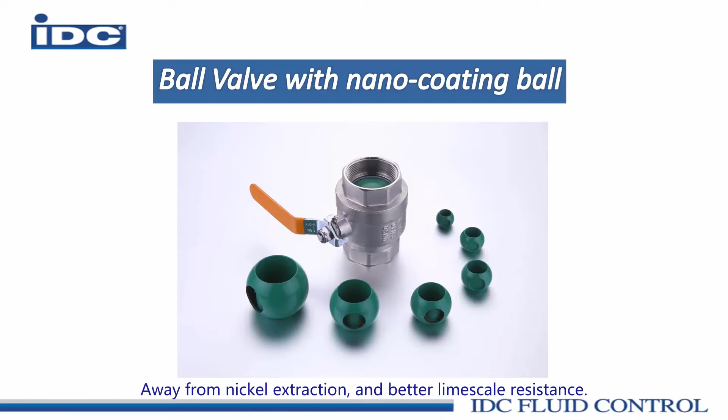Dear customers, I am now introducing a coating solution for ball valves, nano-coating ball. The coating is applicable for water with 3 features: environmentally friendly process, away from nickel extraction, and better lime scale resistance. We used to try different solutions and finally decided to go with nano coating. It came from the kitchenware industry, where pans, pots, and serving plates are made with the technology.

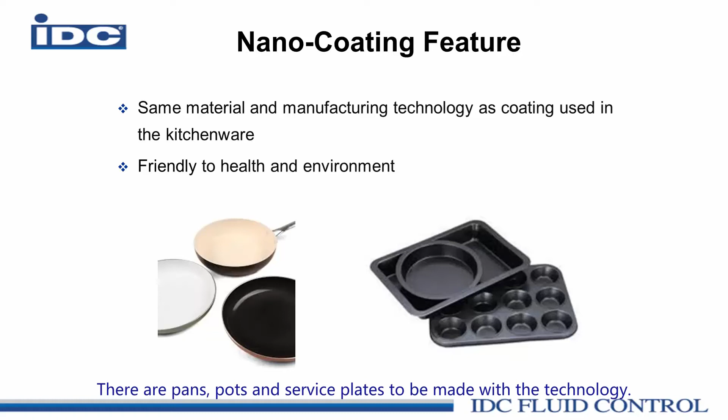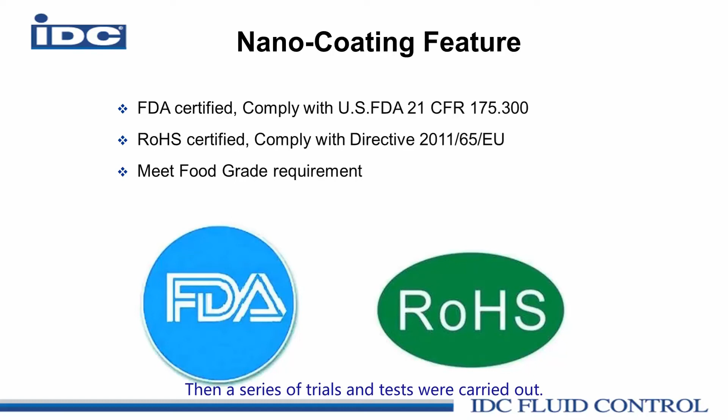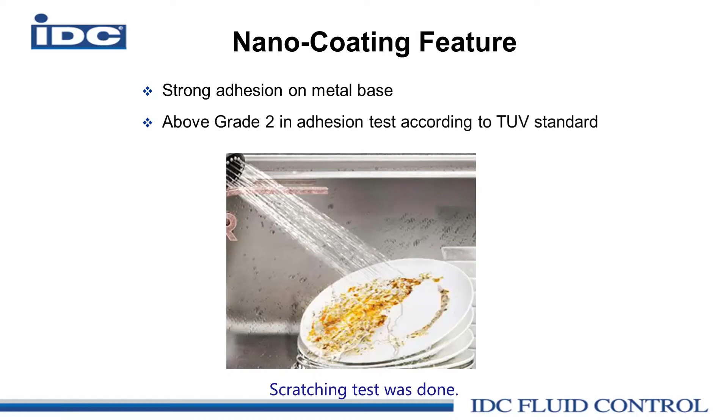We learned and studied the material. It was proved to be acceptable for food grade with FDA approval. Also, it complies with RoHS. We believed it was good for drinking water application. Then, a series of trials and tests were carried out. We did intensive testing on brass and steel base. Scratching test was done. It was well within the acceptable level.

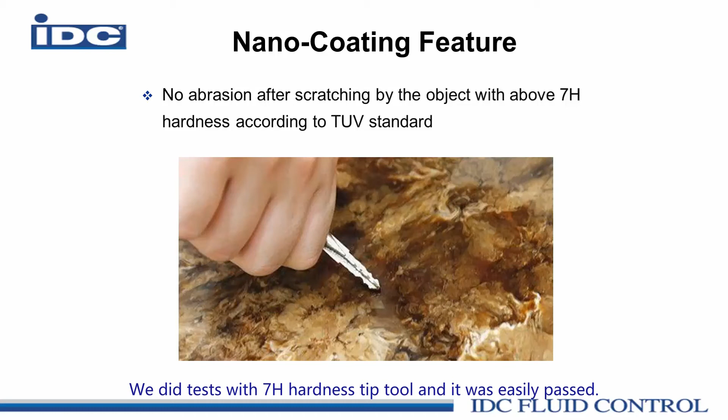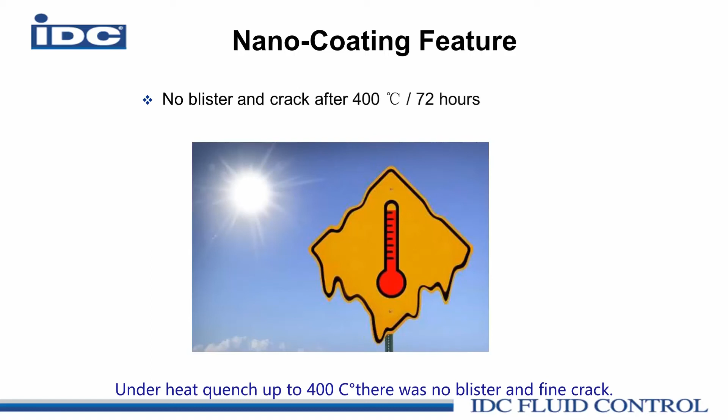Scratching test was performed according to TÜV standard on kitchenware. We did tests with a 7H hardness tip tool and it was easily passed. Endurance to temperature change: it was far more than water application requires. Under heat quench up to 400 degrees Celsius, there was no blister and no fine crack. Abrasion resistance: as shown, a weight was moved back and forth on a flat test piece for 8,000 or 3,000 cycles.

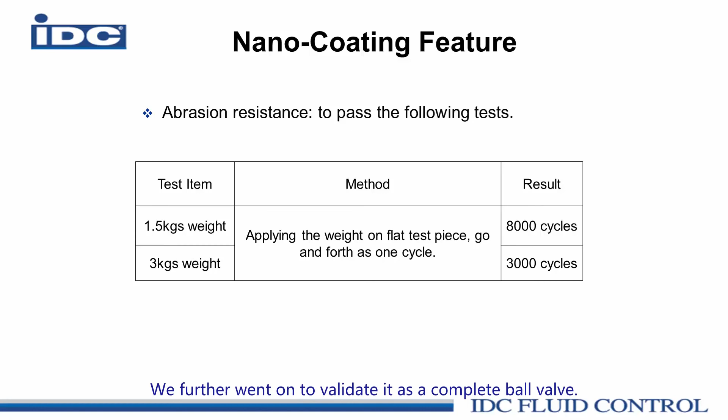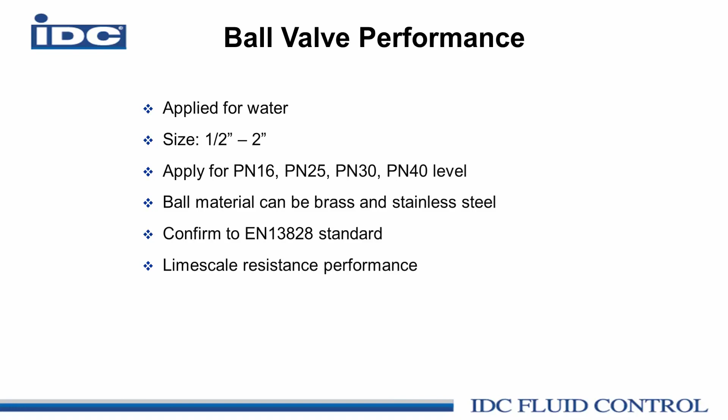We further went on to validate it as a complete ball valve. So far, we validated water application from 1/2 inch to 2 inch with different pressure ranges and both brass and stainless steel base. We did standard tests and also lime scale performance tests. Life cycle test is one of the key tests and it was proved to be very good for abrasion endurance. We did it over 4 times the EN standard. Other major standards are equivalent to EN.

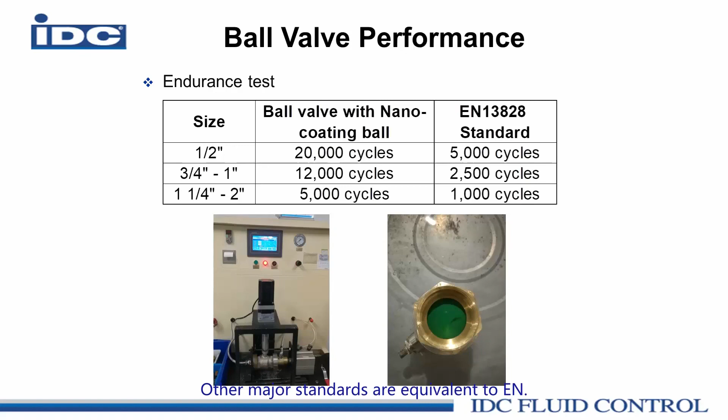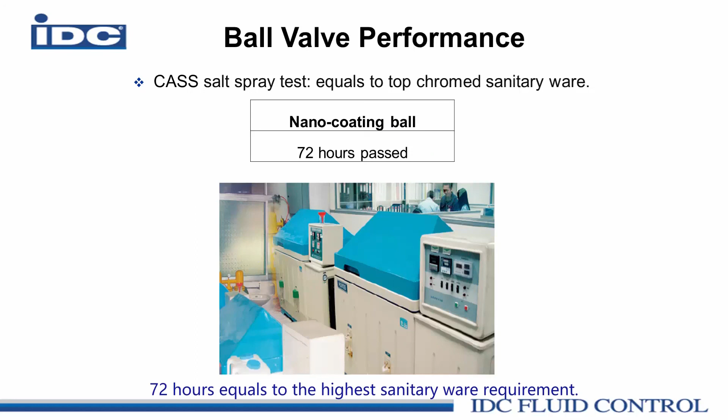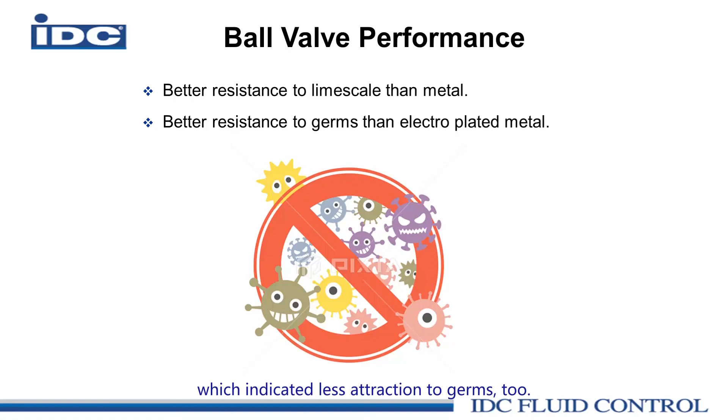CASS salt spray test was done versus chrome-plated ball. 72 hours equals the highest sanitary ware requirement. Comparison limescale resistance tests were done with chrome-plated ball valves. The nano-coating ball suffered distinctly less limescale on the surface, which indicated less attraction to germs too.